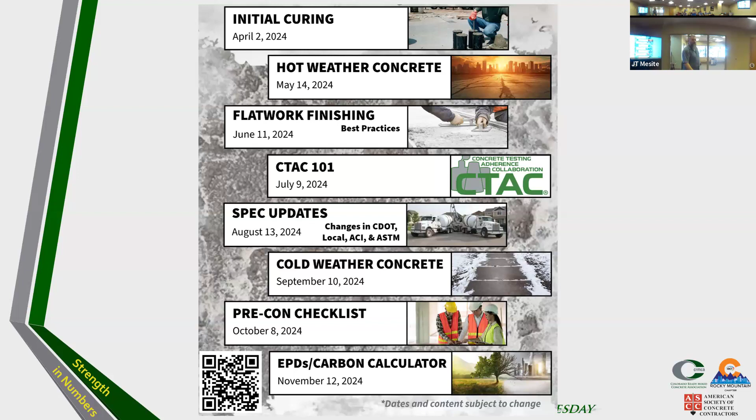So again, this is initial curing, theory versus reality.

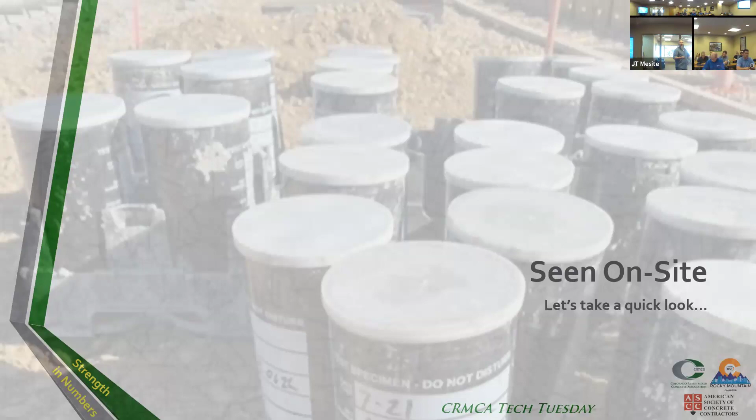So let's take a quick look at some examples. What do we see out on site first, before we actually get into requirements and everything? So the first few slides here, we've got some pictures. I wanted to share some examples of how it should look, right? And all of these pictures you're going to see in the next few slides are from Colorado, just so you know - we've seen it all, okay?

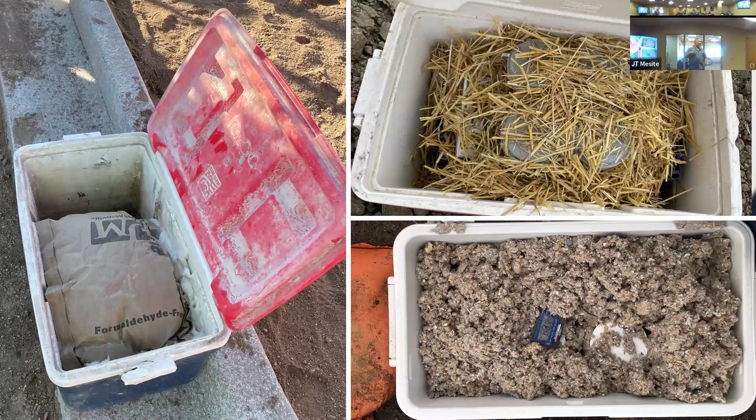Here we'll see that there are initial curing areas. We've got temperature control, temperature monitoring. They're in specific areas where they're either submerged or in a temperature controlled environment, a heated control area, okay? In the wintertime, a lot of the times you have to use something else - you can't just use water in the wintertime, right? Because it's going to get cold just as much. So you've got to have some type of insulation. These are some examples of opportunities for insulation. Note, there are temperature control units in these areas, okay?

But then we start getting into the more questionable cases. This is where you've got to start asking the questions: do these meet requirements? I would love to rip open that bag, wouldn't you? I don't know what's in it. Nobody else does either. But for all of those others, whether it's a water cooler or insulation, you've got to make sure they're fully covered in order to meet the requirements that our standards require.

Then we go into even further questionable actions. Did they even try, right Mike? Isn't that what you said? It's like, did they try? Did any of these try? I'd say two of them tried - one's at least started in the shade over there on the right side, then on the bottom with the cardboard over top.

It's like they tried, but they're still exposed to the exterior weather, ambient weather. They can't be - they have to be in a controlled environment. We'll state it again and again: 60 to 80 degrees. That's what we're looking for. This is not going to keep that control.

If some of these cylinders stay out in the sun all day, suddenly they're going to increase temperature excessively during the day. Then overnight, and it gets cold here even in the summer, those temperatures are going to drop significantly. Now they're going to rise back up tomorrow morning before they even get picked up. They have to be in a controlled environment, and that's what we want to look for.

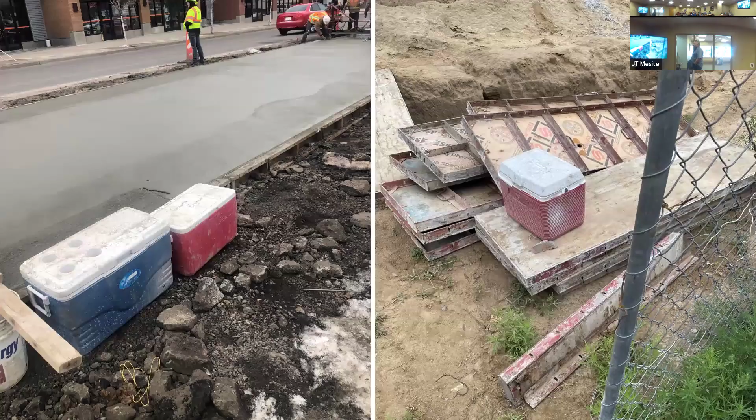Some other scenarios we've got to look for: they've got a cooler, they might have water completely filled in, but does anybody here can tell me what you see wrong in either of these pictures?

Not level, vibrations - what's that? Not level in their vibrations. There's potential vibrations, yes, and not level. We could say that's level, but are those guys doing the forms going to need those forms today? Are they going to need them tomorrow? Those cylinders are going to be moved.

Then the ones on the left, they're right next to the placement. They're standard cures, but they're right next to the placement. They've got to strip those forms probably tomorrow. Now those are going to have to be moved. You can't have them sitting in areas where they're going to be moved, disturbed, vibrating, or anything like that. So we've got to pay attention to these scenarios as well, right?

Now the most important one - yes, we see it, these were really here in Colorado. It happens, and we just take pictures and walk off. We have to start doing something, and no matter what part of the team on a project you are, you've got to start saying something, just like safety out on a project. You have to start saying something. Otherwise this is just going to continue, right?

So let's get into some standards and specifications. I'm going to hand it over to Mike, let him go through all of this stuff. Sure.

Let's distinguish between standard curing and field curing - they really do have two different purposes. The standard curing is to ensure compliance that the ready mix delivered to the site is meeting the specifications, and the standards are really based around the 60 to 80 degrees standard curing condition before they're sent to the lab to be in an even tighter controlled environment.

And since there are some people who are registered from CDOT, AASHTO T23 is what's currently referenced in the CDOT specification. The AASHTO standard naming was changed last year - it is now R100, for making and curing concrete test specimens in the field. You can get that for $77 from AASHTO.

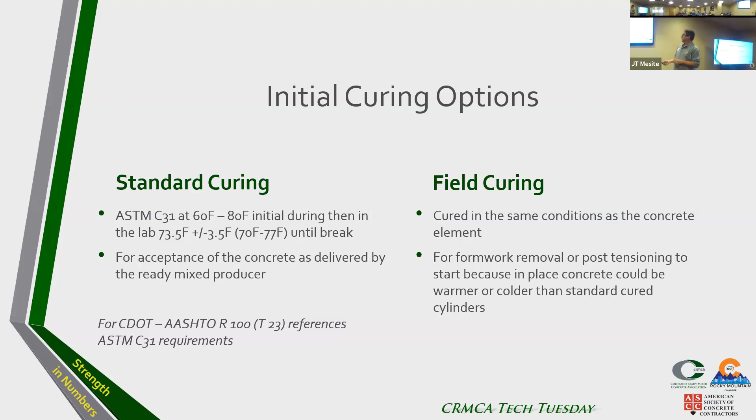Sampling - this seems to be something that's always a challenge. The temptation is to get it right off as it comes down the chute, the first drop of concrete. That's really not how the test is supposed to be performed. It's supposed to be the middle portion, and you're supposed to have at least 2 samples that are mixed as per ASTM C172, and then ASTM C31 will go into initial curing and protection of the cylinders.

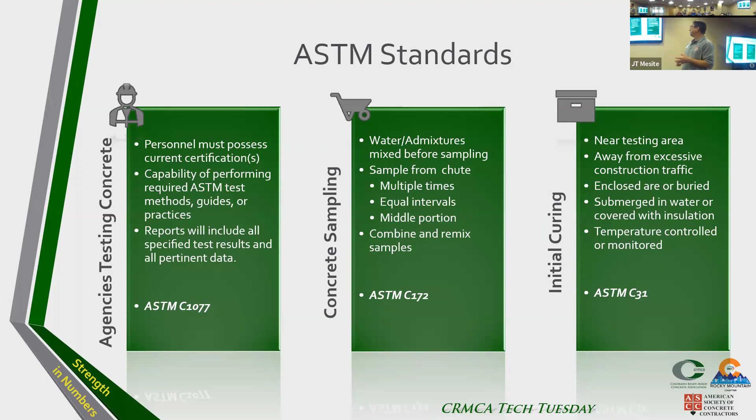So again, I'm not going to read all this information, but the big points to take away: 60 to 80 degrees, and that should be controlled. In a few minutes we'll get into what the impact is of being outside of those standards. And they're even tighter when you're dealing with high strength concrete.

Part of the reason I'm even interested in this topic is a lot of the industry has seen a transition from ASTM C150 type 1-2 cement locally, like a 2.5 here in Colorado, or a high sulfate challenged area.

And now we're using an ASTM C595 1L cement, and it does seem to be more sensitive to that initial curing. So whether the portioning was done differently to compensate for that modified cement, or the material itself seems to be a little more sensitive to temperature variation, it's generating results that may not be consistent with ones that were obtained after coring. It's a general observation that I am actually working on a research project to validate some of that.

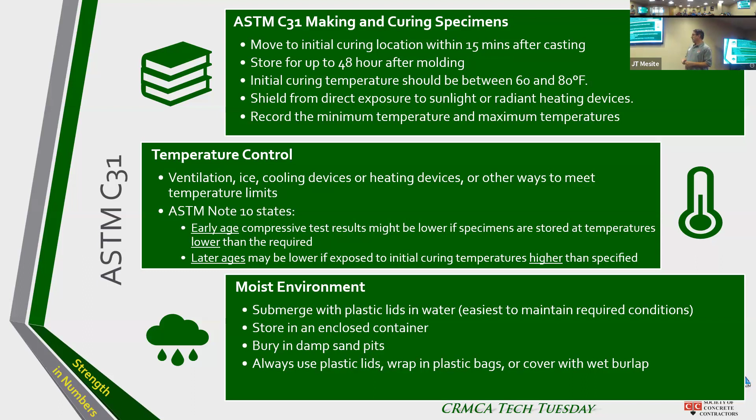Within ACI 301, it references ASTM C31, and also ACI 318 references ASTM C31, all going back to those initial curing conditions. Those two ACI standards are pretty much going to be in any specification you'll see on the building side.

ACI 132 goes into whose responsibility is it for this testing environment. So the engineer of record or the contract could determine whose responsibility it is. That could be either the spec or the contract to modify this, but if no one says otherwise, this would be the default.

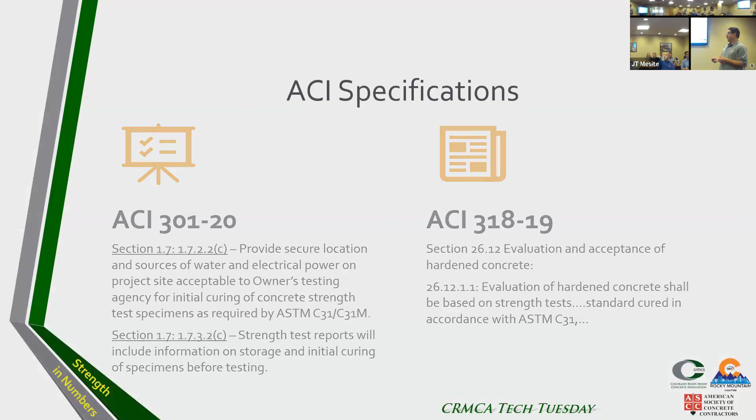Frequency of cylinder tests, so it'd be like every 50 yards, every 100 yards, minimum once per day is pretty common. Any information needs to be on the lab reports, or if there's, for example, low carbon concrete, you may give an exception to go to 56-day strengths as opposed to 28-day strengths.

Contractor, when they say contractor, it's typically talking about a general contractor. They organize a pre-con meeting, we're going to get into that more later. That's an extremely valuable meeting to confirm everyone's expectations about what's going to happen.

Contractor is responsible for informing the lab the day of the placement, so they're there to do the sampling of the plastic and acceptance cylinders.

Providing location for water and power, this can be a big challenge, especially on starter projects. Initial power may be running off generators. So even if everyone's getting the best market-available, temperature-controlled cure box, most of those require power 24/7.

So if everyone's shutting the generators down at the end of the day, basically throughout the night, you're going into an uncontrolled environment, and probably on the weekends the power is being shut off on the generators too, so Saturday and Sunday you'll be in an uncontrolled environment.

So get the expectations established early, so there's not a surprise if you're suddenly realizing that every day at 5 o'clock, and every Friday at 5 o'clock for the whole weekend, we're dealing with an uncontrolled environment, even though you have the right equipment to perform that. So basically you have to make some kind of alternative arrangements.

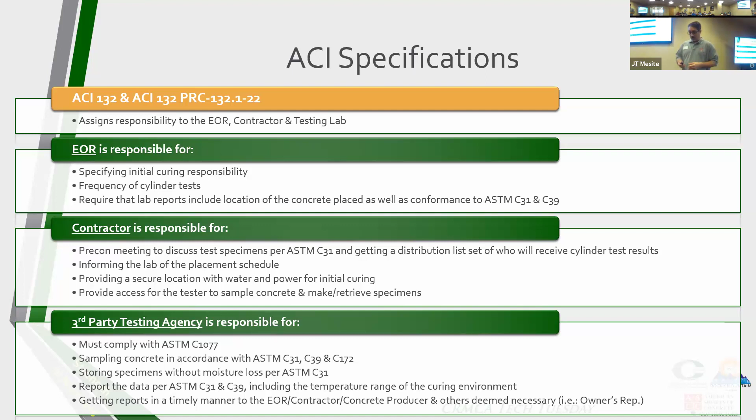And then the need for water readily available for a lot of the water-cured systems. And then basically just confirming responsibility for maintaining, who's providing the materials or maintaining them.

So the pre-con meeting, extremely valuable meeting, get the whole team there - owner, engineer of record, general contractor, concrete specialty contractor, their finishers, finisher foreman ideally, testing agency, ready mix - everyone who's gonna touch this material, just to make sure we're all agreeing.

Can we have water? Where are we gonna test? Where's the washout? Again, frequency of cylinders - is the place where they're gonna be storing them going to be protected?

And then we'll get into how are we monitoring the temperature itself? You can be compliant with the standard with something as simple as a high-low thermometer. Now, I would argue that that's giving you the data point for the coldest second of the day and the hottest second of the day. But everything in between, your guess is as good as the next person's, as far as if it was almost always too hot, or almost always too cold, or almost always just in the right zone, but just for 5 minutes when they opened the door and put it back, it was hitting that high or low. You just don't know unless you have continuous monitoring.

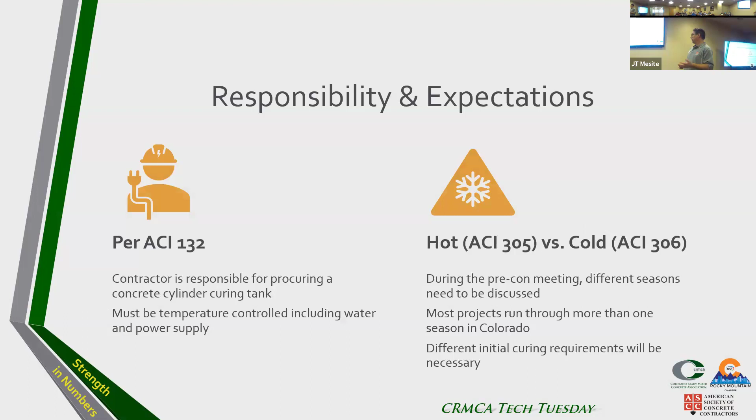So again, per ACI standards 132, 305, 306, these are all things that you want to establish expectations on early, just to make sure the teams agree with what's going to happen.

We touched on this a little earlier, but 68 to 78 degrees is the even tighter temperature range for high strength concrete, 6,000 PSI and higher. And if you're looking for extremely high strength, you really got to hit this window, or there's a very small chance that you're going to get accurate test results.

So I'll just reiterate one last time in regards to those responsibilities. That pre-construction meeting is really very, very important in regards to what Mike said, and for all of those situations, but also determining who's responsible for what as well. Specifically, like the power, which is stated in 132 that it should be included as power supply by the contractor, but is it really going to be 24/7 power?

Are they going to have a generator out there where they're gonna turn it off at 5 o'clock at night because of safety concerns and a potential fire issue? If that's gonna be the case, you have to figure out different methods. So you have to talk about those, and they should be talked about at those pre-construction meetings.

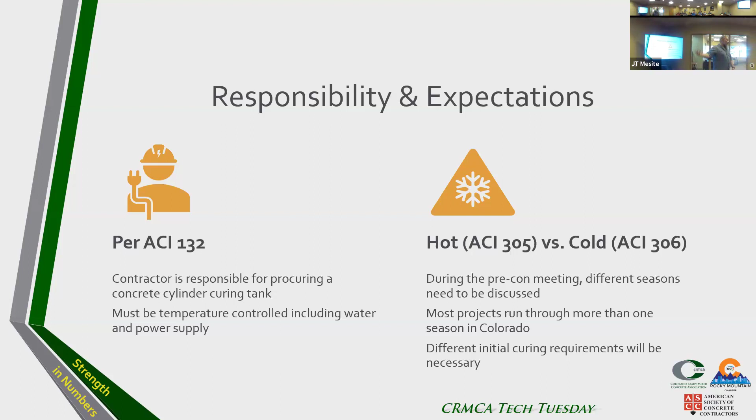So let's go into some of the real numbers that we've seen. Yes. There was a slide, the point of discharge versus the point of pump, and it had a parentheses bullet. Is that still in contention? Yes, it is still in contention.

Every job. If you're working on a commercial job, from my understanding from Mike Eads as well, he deals with it on every single one of his projects with GH Phipps: if there's a pump on site, the engineer wants to sample it out of the pump. It's not Phipps that's forcing it, it's the project engineer that's trying to push to sample out the end. So there are those contentions of where you should be sampling.

As a representative from the producers, my answer is from the back of the truck, because that's what's being delivered, that's what you're paying for. But from an engineer, I understand taking it out of the end of the pump, because that's the point of placement. Best quote I heard was, are you actually testing the mix of the concrete, or are you testing the structure of your engineering? Is the concrete doing what it's supposed to do, or are you worried about your structure? Yes, exactly.

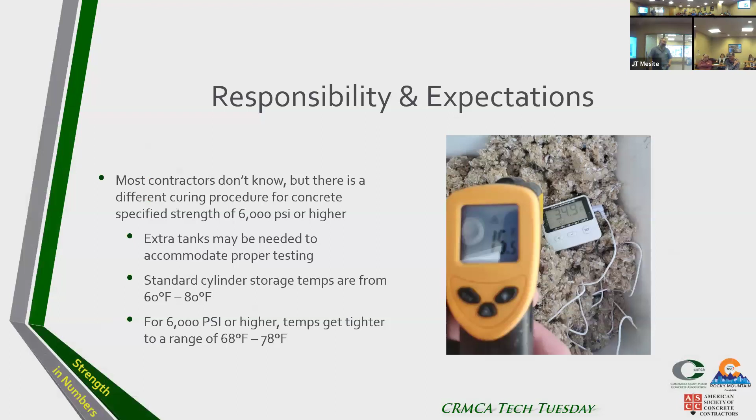Good topic for the pre-con meeting, to figure it out before you're on site. Yes, absolutely a good conversation to have at the pre-con. Pre-cons should really be a lot longer than, honestly, pre-cons that I've been at. And for anybody that works for CDOT, the CDOT meetings might be a little long for some projects, but they don't emphasize this part of it enough, honestly.

They talk about all of the other inspection items for all of the other ticket items, but they don't talk about testing. And this is something that I'm very passionate about personally. I will say over and over again that testing agencies are maybe 0.5% of an overall project in cost, and it is one of the most important things on a concrete project. So there is some variable that we have to get past and figure out the solution to.

So let's talk about some real numbers. We're talking about initial curing, we're talking about the specs. We get it, there's problems going on out there. We know that there's specifications or standards not being met. How do we curb that problem? How do we fix the problem? First one is communication. We already talked about it some with the pre-construction meeting.

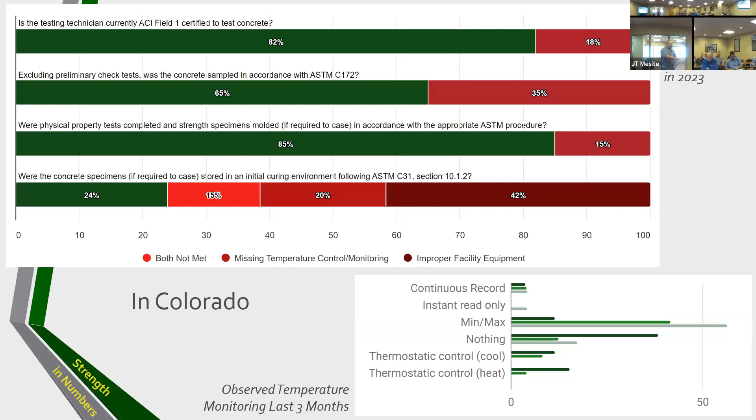Yeah. I thought about doing a presentation in front of CAC and just say, it's in ACI, here are the requirements. Contractor shall do this, but it's not happening on your job. When are you gonna start enforcing? And yes, I'd love to present this program to them. But it turns into a matter of who wants to make that jump and really call out the responsibility. Because yes, the standards already say it, but who's gonna be the first one to step forward? So that's really what it turns into.

So this is in Colorado. You guys think across North America is higher or lower for initial curing? Lower? Higher? Lower, by 8% actually. And just so you know, this includes California, Southern California, which actually put in quite a lot of observations over the last year, as well as Iowa.

Now I'm trying to remember who it is. Kansas City, Iowa, Missouri, Colorado, Canada. Texas has some in there as well, but it's just Dallas-Fort Worth. But yeah, it's all across the country.

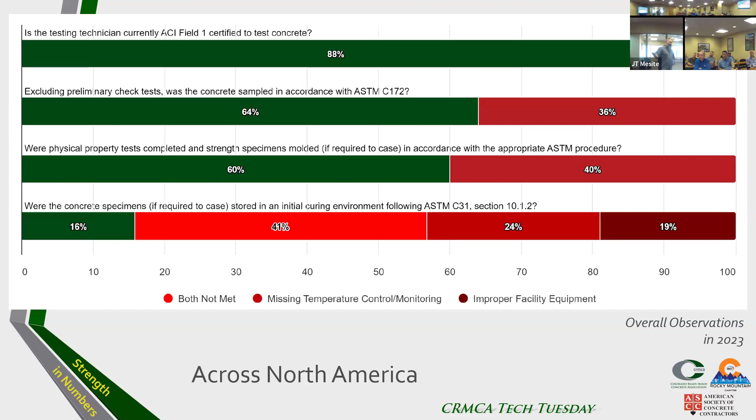Georgia just started, so Alabama is one of the ones we're going to be onboarding in the next couple months. So that's across the country. And it's not just a Colorado problem. That's from what we're seeing in these observations. Now, are they representative of all the concrete testing happening on projects across the country? It might not be.

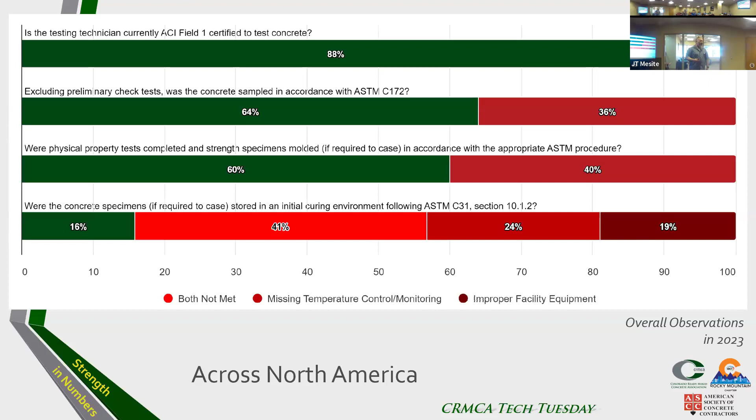But the more observations we get, the more information we're going to see that really truly is representative. So as producers, all the cost savings and CO2 you're saving on 1L, we're having to over-design mixes to compensate for 85% wrong initial curing. Karthik Obla from NRMCA has quoted that 10% of the over-design in concrete mixes is due to poor testing, or the expectation of poor testing. So if we're able to improve testing and create a more consistent result, that 10% of our carbon creation is going to be reduced as well.

How long have they been doing cylinders like this? Curing incorrectly, you mean? No, just in general. Because with that low of a number, to me it almost makes me think that the way we're testing needs to be reevaluated. Is there a better way we should be curing and testing cylinders? That's a pretty low number, even on a nationwide scale.

We start thinking maybe it comes down to enforcement, which is really hard to do in the field. It's not possible unless everybody on that project has that same consensus. And that's the only way it changes, project to project to project.

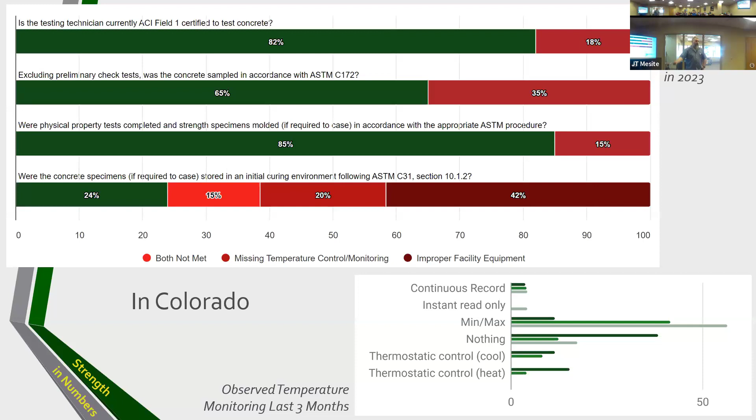So in 2017, I was seeing the numbers from the first couple of years of this program, and I changed the way we did our Field 1 certification training to emphasize initial curing more. Nice, and so that's when we started seeing it a little bit more.

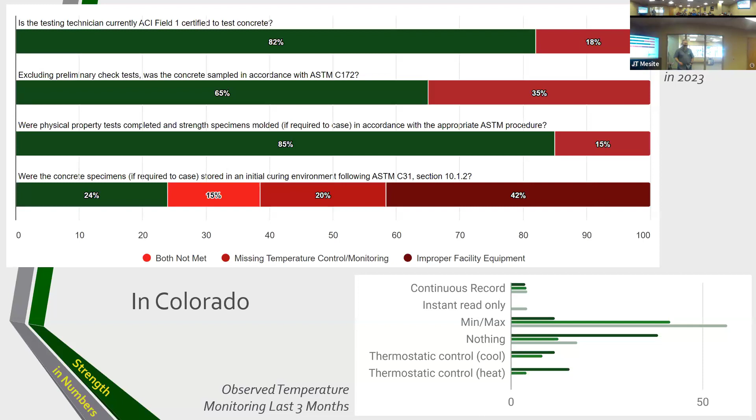And that was when Martin Marietta was submitting 75% of our observations as well. My name on there - I guarantee you, none of mine. Go back and look at 'em.

So we spent quite a bit of time seeing some changes, but we're starting to see some lower information. We can see what the different initial curing environments are just from the last 2 years, as well as the red line, which is overall all time.

But this one's more telling here. If you can see, it's like min-max for monitoring control - that's upwards of 50%. So these are the observations of what they saw out on job sites.

30% of the time they have not seen anything - actually 33% of the time overall, people have not seen any temperature monitor or control. And no, these numbers will not add up to 100, just so you know, because sometimes you have thermostatic control, cool and heat, or one or the other, not always both.

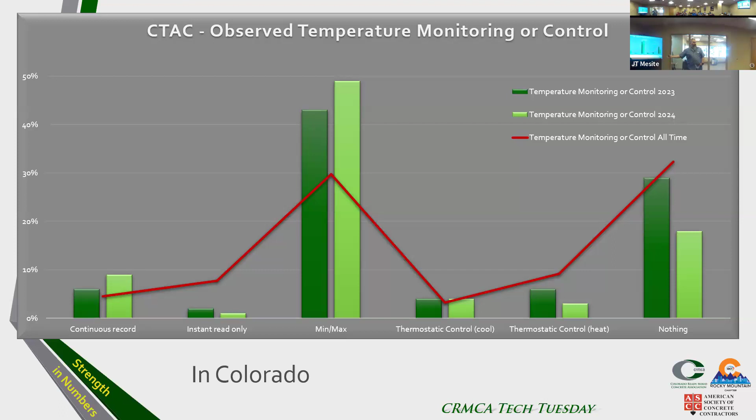But 50% of the time, or even 30% of the time, we're having min-max. 33% of the time we have nothing. The other 33%, we have something else being utilized. But that right there is telling us that we really need to pay attention to what we're using, or making sure these technicians have the equipment and the power to set up initial curing properly.

Is there data showing differences between one set of cylinders cured properly and not cured properly? I will hand it over to Mike for that discussion - that's exactly what we're gonna talk about. I've been thinking the whole time, like, when are we going to get to this? JT, yes, it sounds like there's some questions in the chat. Oh, okay, let's see.

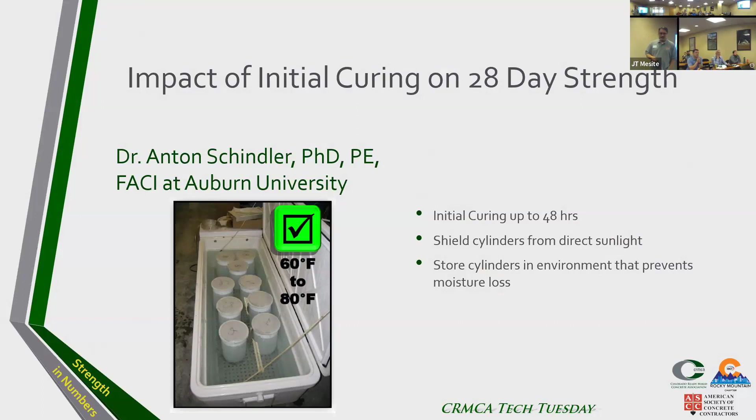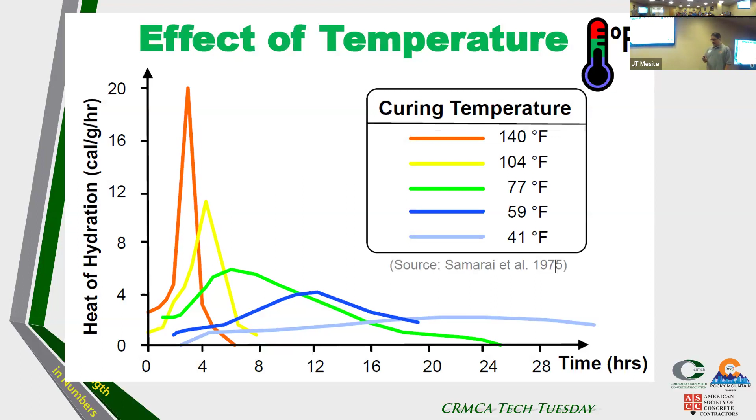So literally what we go through right now is large studies that have been done to analyze what happens if you improperly cure cylinders. In general, if you look at high heat early, you're going to have a hard kick into hydration. This is like 104, 140 degrees down to a very slow initial curing at a cool temperature, just barely warm enough to keep the concrete hydrating. In general, 73 degrees would be the perfect curing conditions for the ASTM standards.

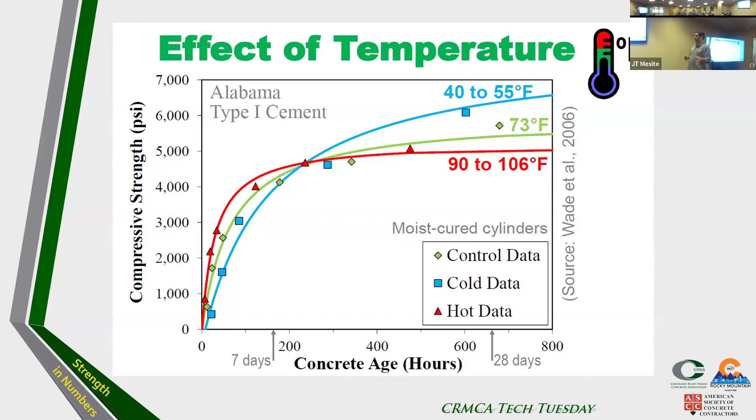If you give it a higher than specified temperature, you'll get early age strength, but your ultimate strength will never reach what it should have if it's been properly cured. And you actually get a benefit on 28-day strength if the cylinders are cured in an environment that's cooler than the specification. And that trend plays itself out when you look at the data.

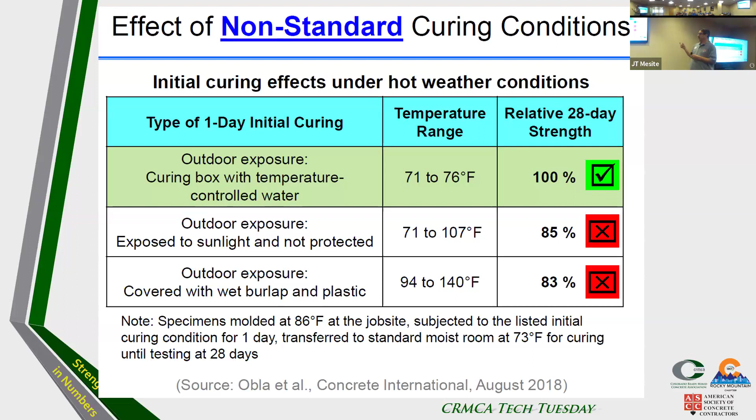So this was from Dr. Anton Schindler, his project for 1 day of non-standard curing. By taking them as high as 140 degrees, they were losing up to 17%, or overall average 17% strength loss compared to the ones maintained in a proper curing environment. That's just for 1 day.

So, in general, high heat is going to give you skewed results. So with that example you saw with the black cylinders out in the sun, that's probably going to get too hot. It's probably going to get you some bad, low break results.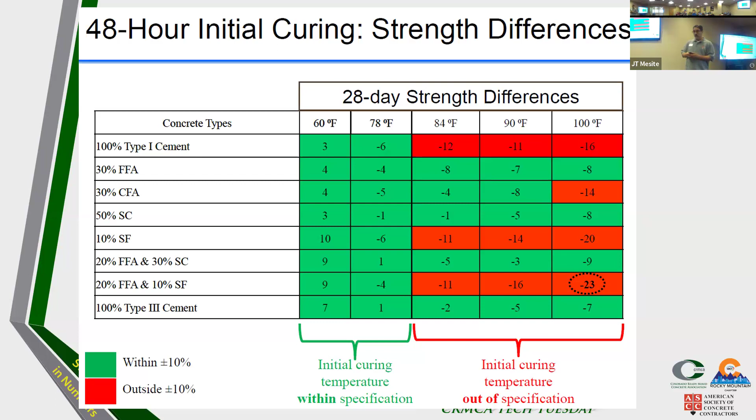So what do you do with this information? Reinforcing that, there was another team that did a couple hundred cylinders. The green represents the standard curing conditions, they go about 6,000 PSI. They gained about 10% by putting them in a cooled environment. They lost 45% by putting them in an oven around 140 degrees, and lost 12% in a hot cure tank with no temperature cooling on it.

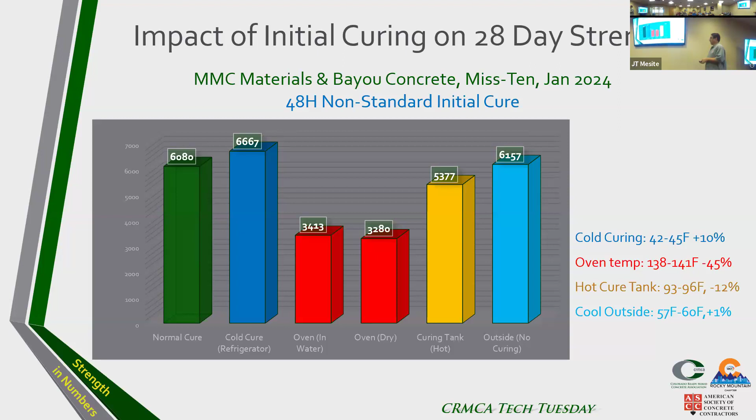Kind of reinforcing that, you'll actually get a benefit from initial cold curing, not representing what it really was. This was Test Fest in Grand Junction, Colorado in February. We hid the names, although we will say this was the reference standard of the CDOT. They basically took the sample to the lab and then molded the cylinders there.

So to me, the most interesting column is versus the perfect curing environment. Pretty much all of these were having a low initial curing temperature. Only the one in the oven was exposed to an extremely high, outside-of-standard curing condition. It lost 30% versus what the same concrete in better conditions was represented by.

The rest of them, in general, this was in a cooler than 60-degree environment for a lot of the time. So they were actually doing pretty good for not having temperature controls, and they were basically in the 90th percentile for most of the samples. Only the one that went straight to the oven lost 30%.

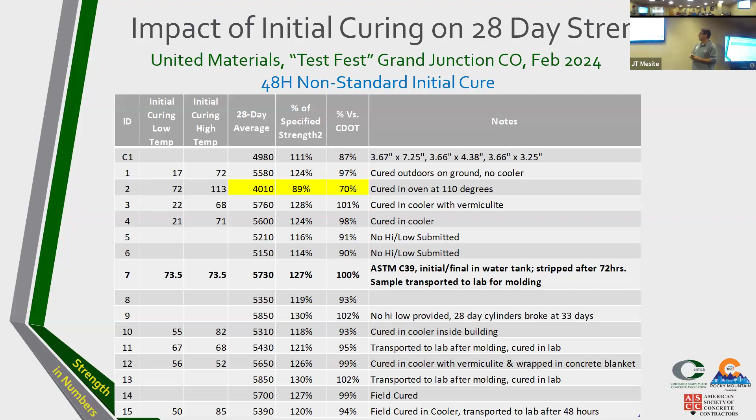So going back to address the high-low thermometer, I just got these little SwitchBot sensors and sent out about 30 of them to different contractors and said, put these in your initial cure box to see what we get. It'll literally take a reading every minute. There are other devices in the market—I'm not endorsing anything, just telling you what's out there. These, I think, monitor every 15 minutes, and some other ones will monitor every 15 to 20 minutes.

This is not waterproof, the SwitchBot, which I didn't realize until it spent a month in a ready mix producer's cure tank and didn't survive a day, literally. So they're inexpensive—if you're in a dry condition, it's just fine. They should last a long time.

But if you really want accurate data, these other products are focused on the specific concrete curing environment, as opposed to something literally made for agricultural use or just around your house. But they're pretty darn cheap, and I would say if you can, this is probably better than nothing. These other ones would be an upgrade from that. Also, I don't want to talk about money, but they are more expensive—you're getting a trade-off in quality for cost.

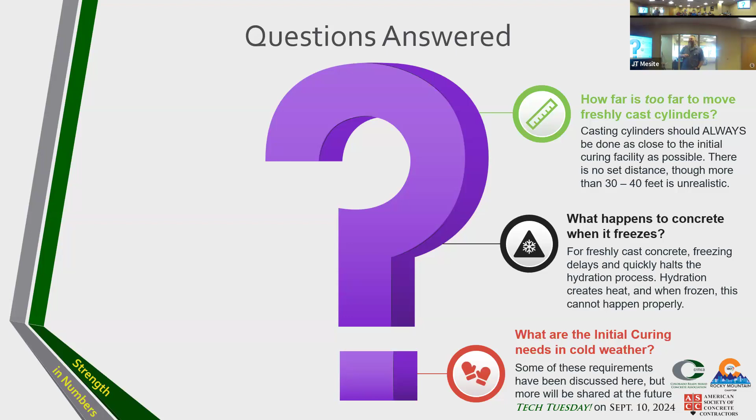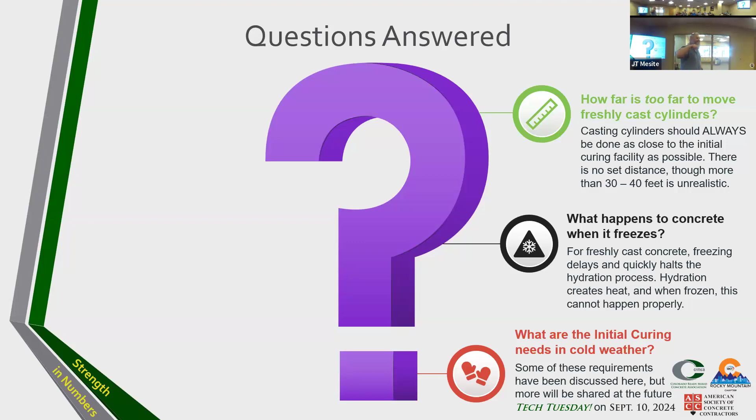So what are the initial needs in cold weather? We've already talked about some of these issues, but since it was asked, we do have a cold weather concrete seminar for Tech Tuesday happening in September. Put it on your calendar. So we will talk about that.

Is testing valid if standards are not followed? Basically, no, because standards are standards are standards. I don't care who you talk to - standards are black and white. Either you follow them or you don't. If you don't follow them, you're not meeting the standard. Therefore, those tests are technically not going to be valid. That's really how you have to look at it.

But you have to really have that conversation with your project team to determine what is acceptable and what is not. Because if you're not following ASTM C31 and the project team is okay with that, you need to make sure that is correct and in place before the project starts. Because now what you're trying to follow in the specifications that say you must follow ASTM C31 - that's not true anymore. So now you have to make those changes. You have to have those conversations beforehand.

Would you want bad test results from initial curing to represent good concrete? I didn't want to say it again, but the simple answer is no.

If Josh is bringing concrete out on a job site and it meets the mix he's required to provide, and the testing doesn't reflect that, is he going to accept that? No. Is the contractor going to accept it because he's paying for it? He shouldn't. The testing agency should be making sure they're doing it correctly. That's really what it boils down to. One of the comments in the chat earlier that I responded to was that there are testing agencies that know what their requirements are and they just don't care - they just don't do it. And that's true, very true, that there are some testing agencies out there that do that.

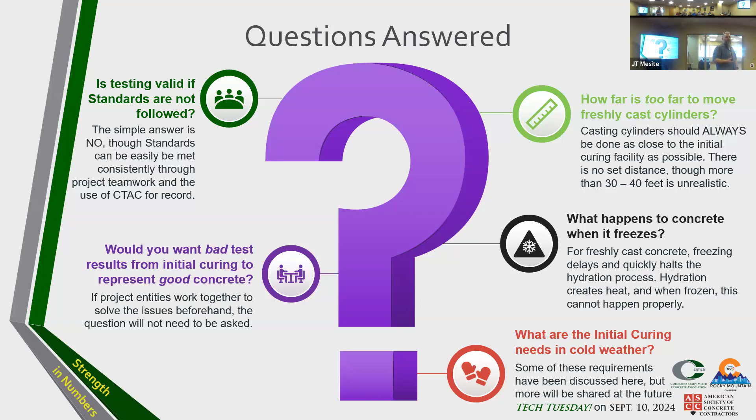And that's what I was kind of alluding to with the morals of the industry, right? You're going to run into those, so you have to have those conversations beforehand, and that's really what it comes back down to - that communication. Utilize the tools that are available. It might be CTAC, it might be something else, a different program, the initial curing bots or pods to put into those initial curing tanks, whatever it may be. Use the tools that are available and have that communication.

So with that, what do we got online? Comment: be careful about taking the position that the test is not valid - if invalidated, it leaves a gap for you to prove performance another way. I guess if you're not performing the initial curing properly, that's the thing to fix. Granted, the cow's already out of the barn if you know it's being done poorly, but yeah - if you know something is being done incorrectly, you know what you can fix.

So it's with other performance aspects to the concrete. If you already know one performance aspect isn't being met, you can fix that, or go into other performance aspects. You can go to coring, you can go to testing the air content on hardened concrete, whatever it may be, to validate that concrete meets the requirements.

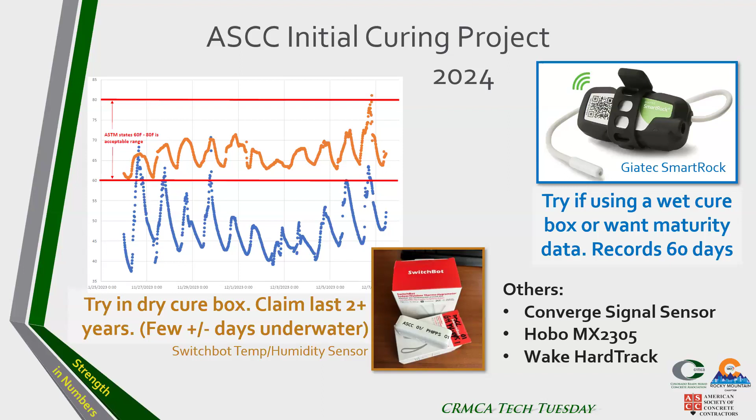Amen. So yeah, there is a problem with 1L cement. And not only that, the water reducers that we are using, the polycarboxylates, those react with cement. They don't react with the 1L limestone in it. So what's happening is you get that 1L limestone in there, and it is starving for water. And so it is fighting the cement for the water. And that is why we are seeing lower strength.

But at least specific to initial curing and standard cured specimens, for any project, if you're making those specimens in the lab for the mix design and they're breaking at a specific strength, they should be when they're being cast out on site as well. Those should be correlating. That's the whole purpose of C31 and C39. Oh shoot, now I can't remember the other one. C94, yeah. It's to actually correlate those samples that are cast out there on projects and cast in the lab. They're supposed to be matching up.